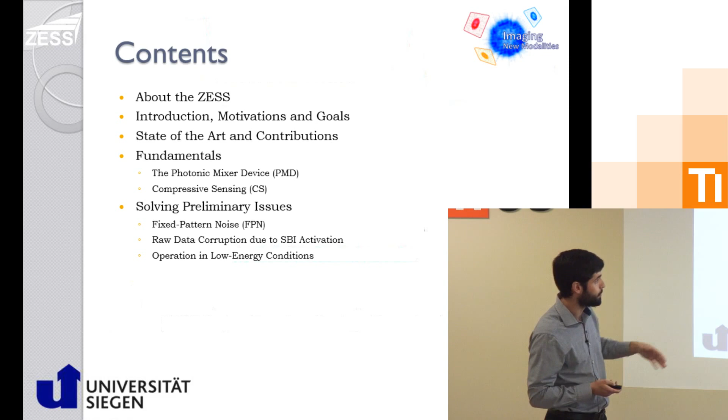Well, and finally, the core of this work is actually compressive sensing for the photonic mixer device. So this is the core of the work. We will see which are the domains in which we can actually apply compressive sensing, and within these domains, we will see we need a sparsity model, so we need to characterize the PMD pixels, modeling the transition from a high resolution domain to the low resolution domain where the signals live. And later we will see that we can actually try sparse recovery both in the spatial domain where the images live and in the time frequency domain where the modulation signals live.

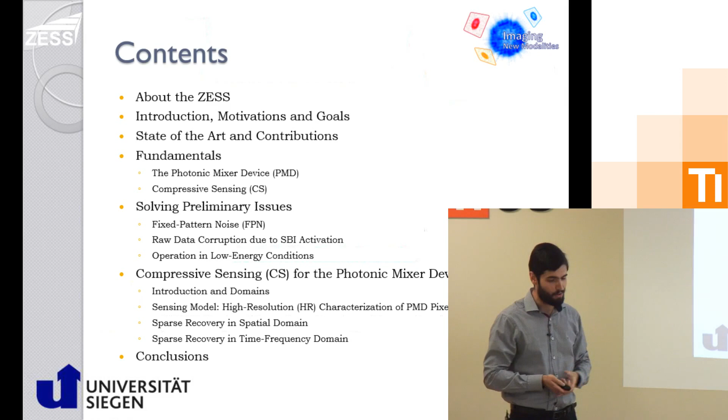Right now, we have no idea about anything. This looks a little bit strange, but we will see it's very easy. You will recognize each of the domains, and you will see that it is actually natural to proceed in the way we proceeded. And we will wrap up with conclusions that will be probably exactly repeating what we did now. So first of all, the sweet part of the presentation.

What is the ZESS, or who we are? Well, the ZESS stands for the Center for Sensor Systems. We are placed in the beautiful city of Siegen, which is actually very nice right now because it's summer. Everything is blooming, maybe too much, and we have sun from the very beginning of the day until the sunset. And my office will be probably around here. And this is a very early picture. Of course, the color is getting clearer and clearer. They are not yellow anymore, but we have a location that is very green there in Siegen. I think Paula knows.

And now we will see more or less our organization. So first of all, we have different individual project sectors, so different projects that in principle may look individual, but we have a kind of horizontal connection, we have cooperations in between, and so on. And later, well, all these projects somehow span 3 fields of competence, mostly sensor development. This is the area where you don't really want to be because things do not work properly.

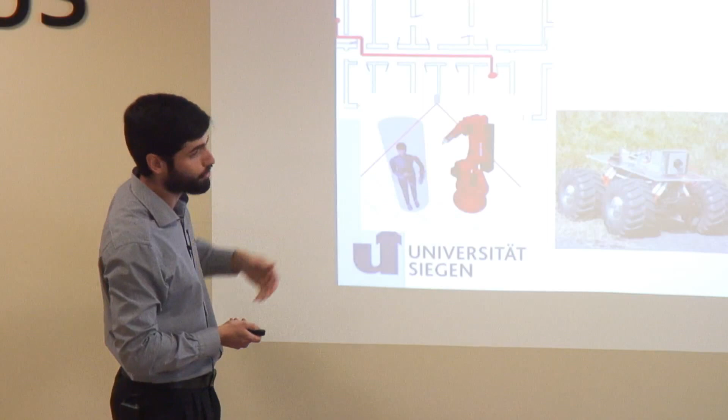Imagine these very initial SICK laser scanners that we used to mount in these mobile platforms - this really had a large cost, and of course is sequential. So one of these time-of-flight cameras could acquire the whole complete depth profile in a single acquisition. Of course we can use it for SLAM or simply navigation in a known environment, for defining safe areas in industry and things like that.

Later we also have the area of Earth observation or remote sensing, for example using satellites, drones or planes. Structure monitoring or structural health monitoring, distributed sensor systems and so on. Also, in a different area, the area of graphics, so simulation, computer graphics in general. We also covered that partially in cooperation with the GRK.

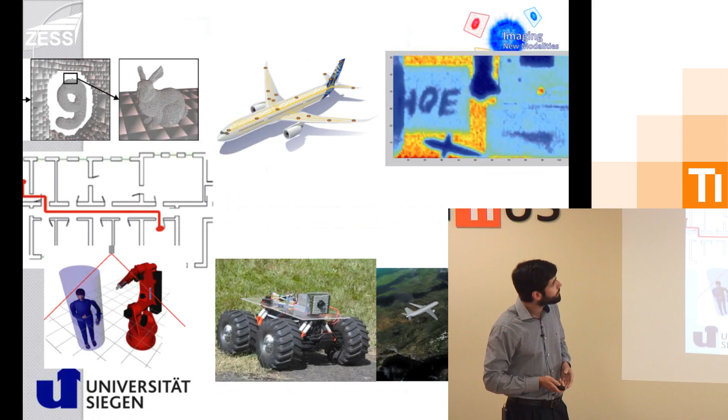And of course, synthetic aperture radar, SAR image processing. Everybody knows that radar images and SAR images are often very noisy, so the processing to get a very clean resolved image where you can actually recognize or segment structure on the ground is very important, and is one of the focuses of the institute also.

And one of our pearls, the ZESS multicam, is a 2D/3D sensor. Everybody knows probably the Kinect sensor from Microsoft, and many sensors that are multimodal. So you have on the one hand this RGB camera that is a conventional 2D camera, and on the other hand next to it a 3D camera, or a time-of-flight camera in the second generation. In this case we have both cameras in a single system with a single optical path.

So there is only one lens here. This is not a lens, this is the illumination system - the lens is within it. And then here we have a kind of beam splitter. It's not really a beam splitter, it splits by wavelengths, so you don't lose like half of the radiation for each side. We can mount inside both the RGB sensor and the time-of-flight sensor without problems of registration of different occlusions and so on that we really get in the Kinect sensor or in commercial sensors.

Well, so this is enough for a relatively close already overview of the center of what we do. And now we have to wait until the slide goes to the next. Probably it will happen, but it's good that it got blocked sadly in this one, because we are going to talk about time of flight. So definitely, oh yes, and now it's perfectly placed in the center of the image.

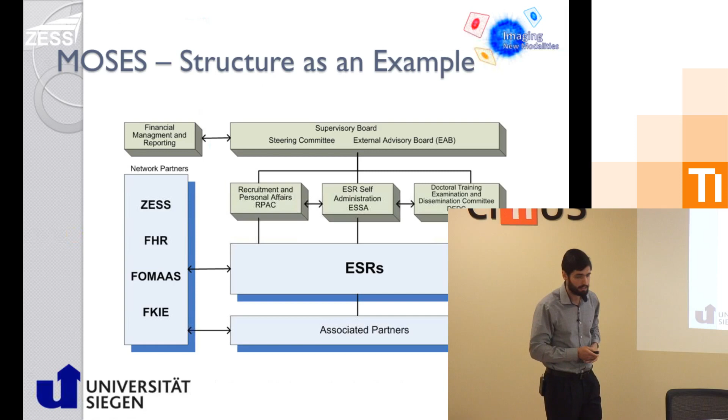And later, this small block here seems to have a lot of importance in practice: the financial managing and reporting. So that's an overview of the structure. And now we are done with the boring things, let's have a look at real results, at how what we do looks like when it works.

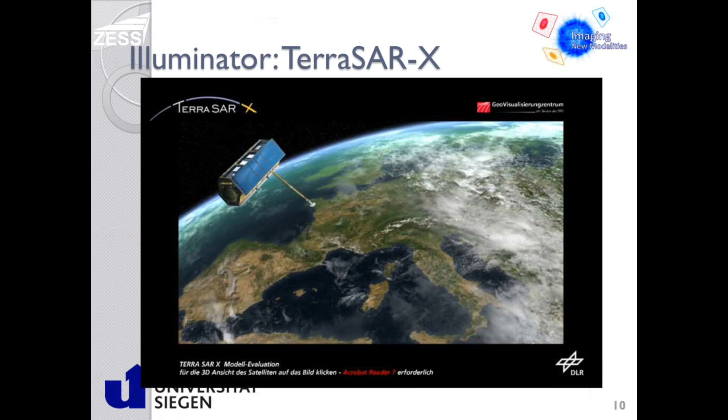Here we have something called a bistatic SAR with a stationary receiver. What we did mostly was use the TerraSAR-X, a satellite orbiting around the Earth, as an external illuminator of our scene. We placed next to the scene a system with a receiver pointing at the emitter, and another receiver getting the echo from the scene. Both signals are mixed thanks to a local oscillator, and later digitized.

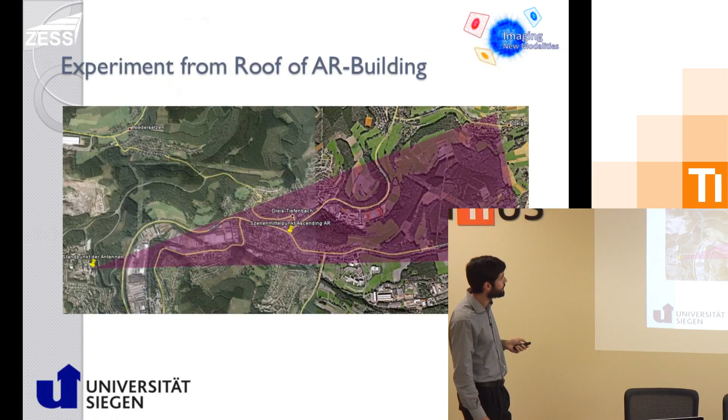And this is our scene, where both antennas were placed, these horn antennas we saw before. This is the valley in front of the university, the area of the University of Siegen from the Adolf Reichwein campus building. This is one of the horn antennas receiving the echo from the scene. We waited until the satellite went over the scene illuminating it. This is the other horn antenna pointing at the satellite, and this is the hitchhiker system, an almost practically commercial system built by our SAR team at ZESS, but completely compact, a closed solution already.

And this is the scene, and this is how the final imaging result from the SAR experiments looks like. You can recognize forest areas, areas with trees, structures such as buildings, and here a big structure which is an industrial site in reality.

So this is how the optical image from a satellite would look like. You can try to register both of them and see that there is a very good overlap. You can even see here these beams of the structure, due to the iron beams, this steel structure of the industry that in principle from an optical image you cannot really deduce what is behind.

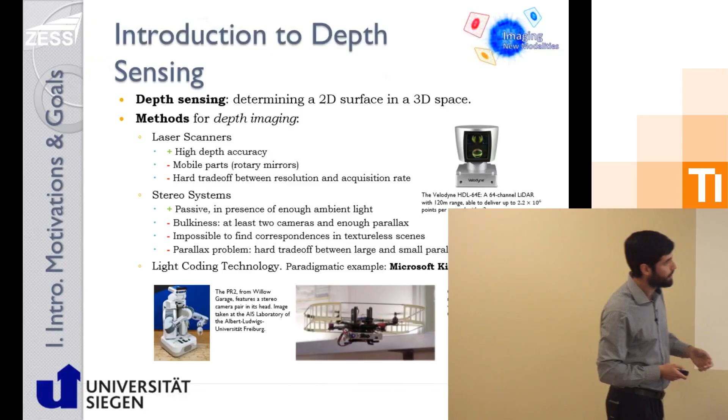It was mounted in quadcopters back 6 years ago or more, and it was doing a very good SLAM work, reconstructing the indoor of buildings and things like that. We even mounted it in our PR2 robot in the Autonomous Intelligent Systems lab in Freiburg for indoor SLAM, and it was working pretty nicely also. Okay, so this is what we have as introduction. What else we can do?

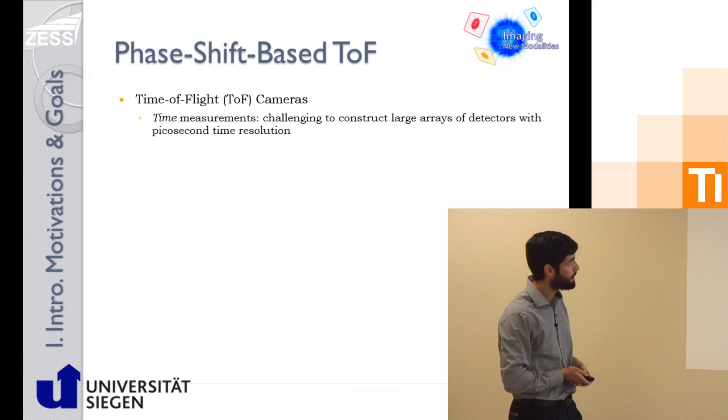We can use what is called a time-of-flight camera for 3D sensing. So, of course, time-of-flight tells that we measure time. But measuring time is complicated. If you want to build an array of sensors or detectors that are measuring time up to the picosecond resolution, you will run into a problem if you want to build really a large array of those. And therefore, we'd rather measure phase.

So we have here our user that is in front of the camera, praying for the camera being eye safe, and we emit the radiation to the subject. We typically use either an LED or a laser emitter, which is modulated by this module here, which generates both the signal for the modulation and the signal for the integration. That regulates this array of detectors, whatever a detector is in principle.

And of course, the subject is emitting a reflection that is concentrated on our array, and this reflection will be shifted. This signal was modulated in principle, and now the phase shift will contain the information we want. So the depth is somehow coded in this phase shift, and we can solve it. We have the depth from this phase shift, this is the speed of light, this is 2 times 2 pi because you have to go and come back, and this is the modulation frequency that we all know because we are modulating.

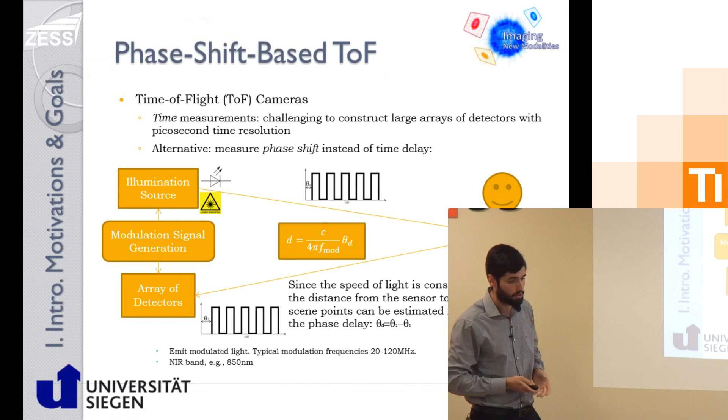So problem solved. Typical modulation frequencies are between 20 to 120 megahertz. We work in the near infrared band. For example, ourselves, we work with 850 nanometers. What are the problems? So why we had to work? Well, we have a resolution that is low when compared with conventional color cameras.

So if you compare the 19K and the 41K sensors of PMD, PMD Tech is the company who manufactures them, we see that the resolutions are definitely 1 order of magnitude lower than a conventional color camera. The Kinect sensor version 2, the newest one, has a higher resolution, but still is 1 order of magnitude lower. So when you try to combine both images, you run into a problem in principle.

And also relatively low depth accuracy. So despite theoretically you can go down to the millimeter range, in practice, in real conditions, we are within a couple of centimeters accuracy, except for the Kinect version 2, which really has an outstanding millimeter accuracy in real operation, but the range is limited to 4.5 meters.

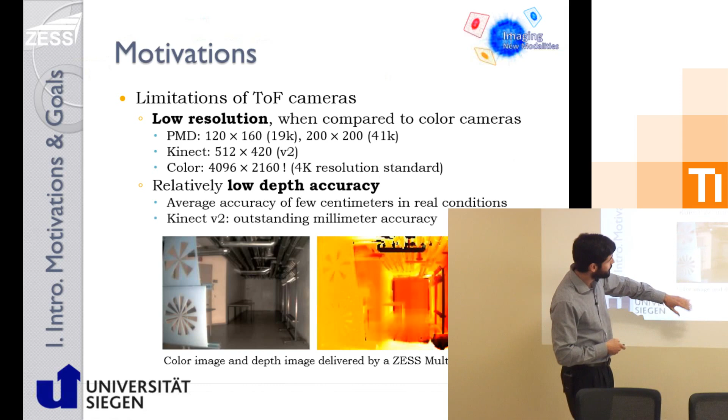And here we see the output of one of our ZESS multicams. You saw it before. So this is the color image, and this is the depth image. You cannot see much because there is not enough dynamic range, but you can already see that the resolution of the image is much lower. You see it here in this Siemens star, where you cannot resolve those fields. You see also that the accuracy is not very good. So there are rather noisy effects going on there.

Okay, so we have the problems, and now why we think that compressive sensing can help. Well, first we have to see what we have as problem from the compressive sensing point of view. So in the case of poor resolution, why we have poor resolution? If normal cameras are so good and have so many pixels, well, we need a relatively large pixel.

So the pixels are large and have a complex structure to do this phase shift estimation, and there is a relatively large blind area all around the pixel. So in the end, you have a sensitive area that is very small, and a large area that is blind.

So somehow you no longer are taking samples of a signal like in the traditional way. When you sample a signal in the oscilloscope, they are real samples. In principle, you hope so. But we have measurements that are done according to a certain measurement kernel, measurement function, that is given by the pixel itself. This is the first thing to take into account.

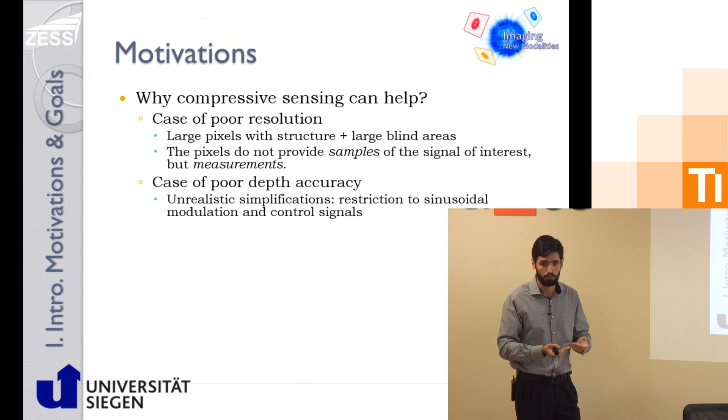The second thing is that looking at the poor depth accuracy, at the end of the day, you have to extract this depth. So you have to compute the depth from the raw measurements of the sensor, and this means modeling, and this means sticking to unrealistic assumptions. For example, we typically assume that the signals, both the modulation and the control signals, are sinusoidal to estimate this shift easily. And this is also wrong.

So in general, in both cases, we have incomplete measurements, noisy measurements, from which we want to extract our signals. This is where compressive sensing comes into the game, and we need to recover those original signals from those not so good measurements. And for this, we need first sparsity models of the signals we want to recover. So for recovering the signals, we need them to be sparse, low complexity, somehow explainable in an easy way. Otherwise, we cannot do magic. We will not be able to recover the signals if they look like random noise.

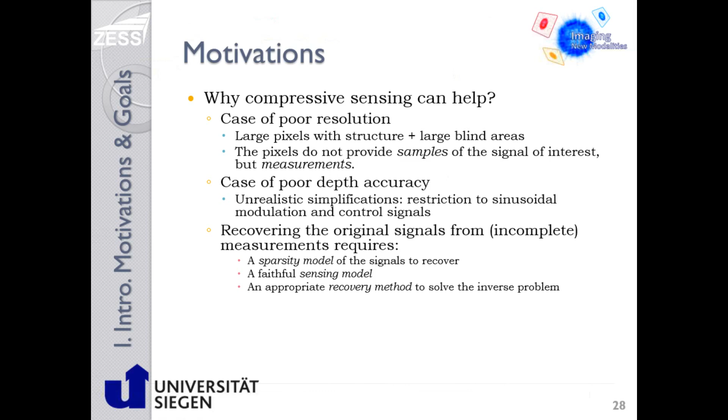That's clear. Second, a faithful sensing model. So we need to know what's going on. We need to know the forward transformation if you want to jump to the other side. Maybe you model it and you cannot jump anyway, but you need to know the way that you were following if you want to go the way back. This is a step 0, let's say. And finally, an appropriate recovery method that allows you to solve the inverse problem, which is an ill-posed problem in principle. It's an underdetermined problem. So 3 critical points, keep it in mind, but the main goal of the whole thing is to get depth images, to get these 3D images of better quality than before, using the same raw data from the same sensor.

Okay, first of all, we have to look in which signal domains we can apply compressive sensing with some advantage. Once we identify the domains, we study up to which extent the compressive sensing requirements, this compressibility, this sparsity, for example, are fulfilled. Later, we develop techniques that are oriented to optimal signal conditioning in the sense that we try to push this fulfillment of the compressive sensing requirements, okay? Optimal conditioning from a compressive sensing point of view.

And finally, this is the core of the work. We develop methods applying compressive sensing in the fields that we will find. They are going to be two. And with the main objectives of solving the problems that we saw before. On the one hand, improving the lateral resolution of the images, more pixels, but meaningful pixels, so to say, and improve the depth accuracy, so less depth error. And/or resolution. In this case, this resolution means resolving more than one target per pixel, but this will not be covered in depth here.

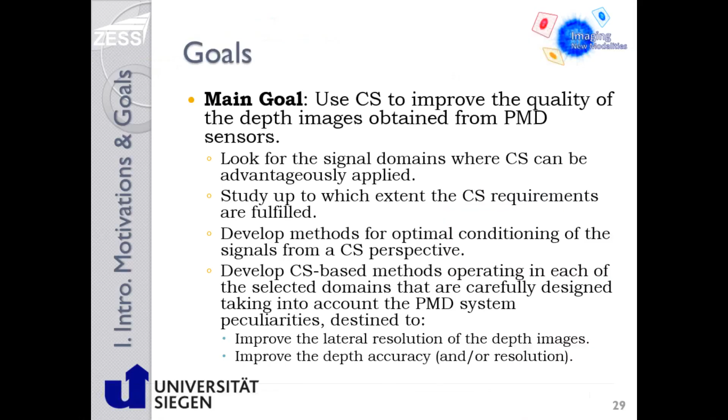Okay, did someone work on that before? The answer is always yes, whatever is the question. So, of course, we have a corpus of works applying compressive sensing to time-of-flight imaging. We have what was called a single pixel time-of-flight depth camera, which was a PMD array working as a single pixel camera, with an external spatial light modulator, like the initial single pixel camera. So it's simply a replica in the time-of-flight case. Later, the CoDAC framework, which used a photodetector instead of a PMD sensor. And it also used spatiotemporally modulated illumination. And some evolutions of the CoDAC framework in which this photodetector was substituted by a photon counting detector.

But all these approaches are kind of naturally restricted to a single sensor element. So if you can build an array, despite it does not have so many pixels, why are you going to use a single pixel element and collapse the bandwidth of the system without a reason? And then we have other approaches that brought compressive sensing to the photonic mixer device, and we have these transient imaging inspired approaches, so you can imagine many frequencies and many different phase shifts which are kind of probing the scene, and always quasi-sinusoidally modulated light.

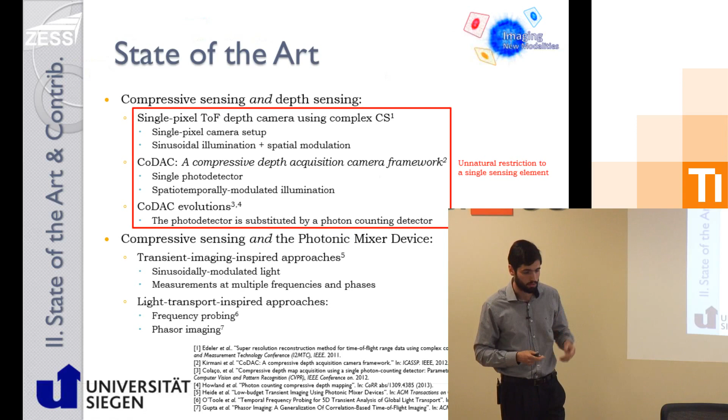And also light transport inspired approaches like this frequency probing here, and this phasor imaging. Frequency probing also uses many different frequencies as before, and phasor imaging uses a very convenient phasor formulation of the whole problem, in which the return is modeled as a certain intensity, which is the amplitude of the phasor, and the phase shift is modeled as the phase of the phasor. And they make use of the fact that at very high frequencies the global light transport vanishes and things like that. So of course you can do a lot if you really have a large bandwidth in your system.

And all these already take profit from an array of what is called correlated sensing elements, which are the PMD pixels. So what can we contribute? Well, first of all, we have some methods for solving preliminary issues that would preclude the direct application of compressive sensing into the game. As I said before, fixed pattern noise, SBI activation, low energy operation. Later, we provide a faithful characterization, this sensing model, of the response of the PMD pixels in spatial domain. So the 2D spatial domain, the physical surface domain of the pixel at subpixel scale.

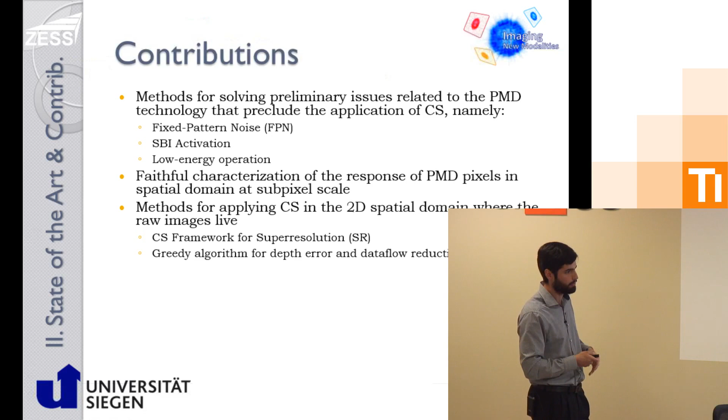This is important. And some methods for applying compressive sensing in this 2D spatial domain where the raw images live, so pixel domain, not subpixel domain anymore. And here we provide both a compressive sensing framework for super resolution, so upscaling the resolution, and a greedy algorithm for depth error reduction and data flow reduction. So this is the other way around, reducing depth error.

And later in the other domain, in the time frequency domain, so no longer the spatial domain, we have a method for simultaneous multi-channel recovery of the waveforms that we are receiving at the pixel, and later an evolution of that, which is a complete framework for both waveform reconstruction and phase retrieval. Of course, if you can reconstruct the waveform that is arriving to your pixel, you can resolve the phase. That's no problem. You have full information if you are able to recover the full waveform.

Now, probably for you the most interesting part of the talk, the fundamentals of compressive sensing and of the photonic mixer device. I will present first the hardware, the photonic mixer device, and later some concepts of compressive sensing theory. So, the so-called PMD pixels, or intelligent, smart pixels, are pixels that are able to sample the cross-correlation function between the signal we are receiving at the pixel and a control signal, which is typically the same that we are emitting, or the same shape at least.

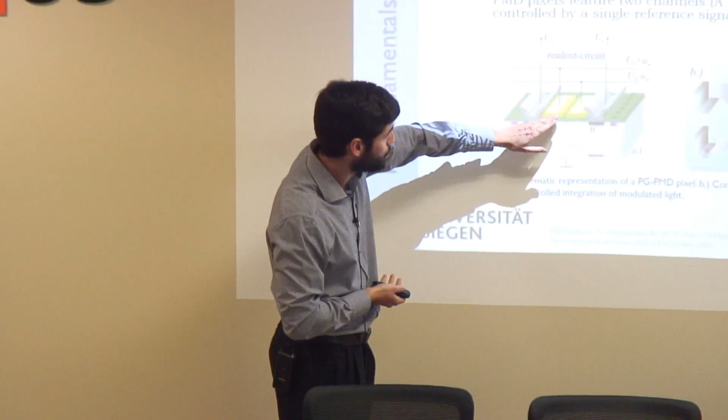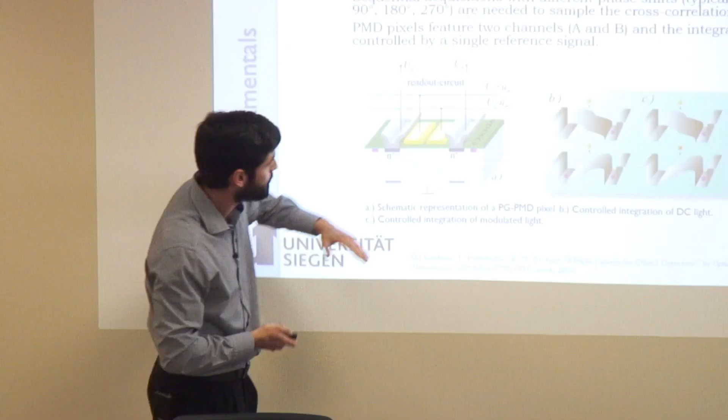terminals here on top. And of course the photons go through and collide here, and the photo-generated carriers are generated in this area here. And you use these 2 transparent terminals to produce a gradient in this lower area and push or pull the carriers to one side or to the other. And these are the integration wells where you are going to store the carriers. This is the silicon oxide, and this is silicon. And for this we need a certain potential that is relatively large, plus this differential potential that is going to control the gradient to one side or to the other.

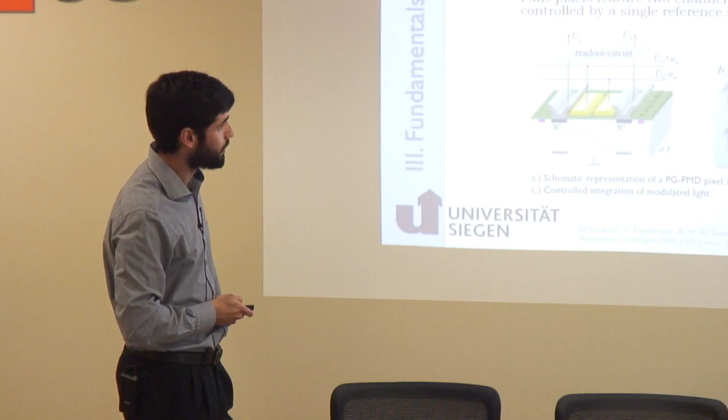And now you can imagine, if you work in a binary operation, it will go either to the channel A or to the channel B. So you have the capability of controlling the integration. Typically, square signals, 50% duty cycle. And this is how we work. We call one channel A and one channel B. Normally, once we have these 4 phase measurements, we have to extract the depth. And normally we apply the so-called 4 phases algorithm, which estimates the 3 free parameters, namely the constant offset due to the background illumination and the constant part of the signal we emit, the signal amplitude, which is influenced by the power we emit and the reflectivity of the target, etc., and the phase shift.

So those are for us contingencies, so to say. What we are interested in resolving is the phase shift, but we have always 3 free parameters, and the 4 phases algorithm is able to extract these 3 free parameters from the 4 measurements. In principle, 3 measurements would be enough, but this has certain nice properties due to symmetry. And what we do is an arctangent transformation.

Once we have the phase, we can use the previous equation we saw before. It's just a constant transformation to the depth. But as we can see here, remember, it's an arctangent transformation of the quotient between these differences between measurements. So it's a nonlinear process. Okay, now let's go to compressive sensing. So that is how the PMD technology works.

What is compressive sensing? So the challenge in compressive sensing is to recover a signal, an n-dimensional signal S, from few measurements, for example, a vector of measurements y that lives in an m-dimensional space, where m is much lower than n. So a traditionally ill-posed problem, a problem that is impossible. Now, compressive sensing requires, first of all, a linear sensing model. So we need to model the whole process as a linear transformation, which is a matrix. So we need a sensing matrix here.

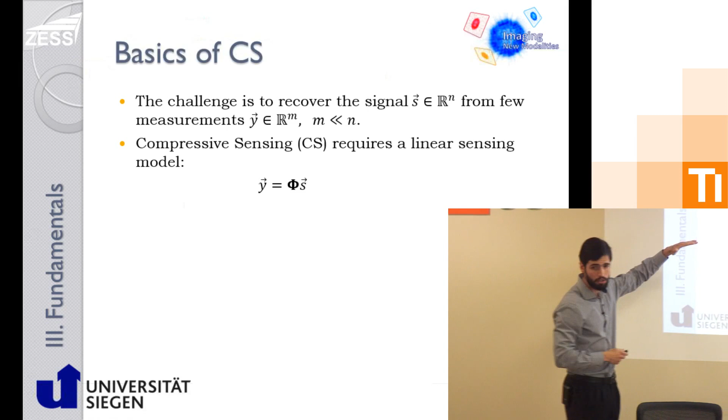As you may see, it is a wide matrix. So it's a matrix that has a number of rows much lower than the number of columns. So an underdetermined system. And of course, we have certain conditions for recoverability, and for the signal to be recovered, we need that the signal is sparse. We saw it before, or compressible. That means that the k-term approximation error decays, the compression error decays very rapidly with the compression rate.

And this, we model it as the representation with this dictionary or representation basis, which we denote by psi. And this x here is now the vector of sparse coefficients. So it's a vector in which most of the coefficients are 0. Why? Because in the real world, most of the signals are not sparse. If I see around, nothing is sparse. I don't see 0 signals anywhere. But I know that there is some structure behind. I see that not everything is random noise. Therefore, there should exist a transformation that transfers this real world signal into a sparse signal.

And this is accomplished by this dictionary here, which in the easiest case is just a basis. So it's an orthonormal basis, for example. And later we can construct this measurement matrix, which is just the product of these two, and work directly in the sparse domain. So see the system: vector of measurements, measurement matrix, a sparse signal. This is what we will see all the time. There is nothing else than that.

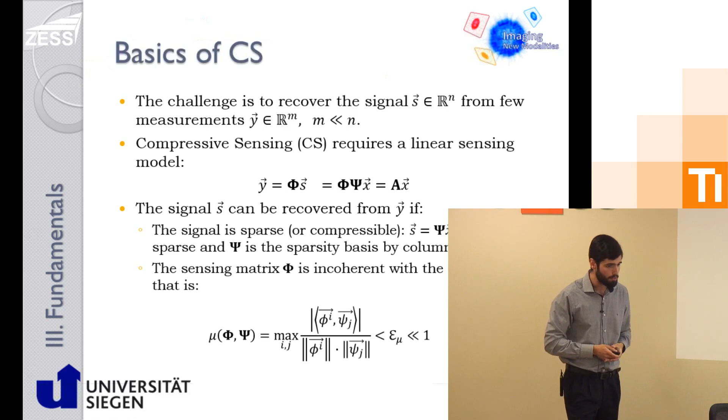How can we measure coherence? Well, this is a traditional or more or less commonly accepted measure of the coherence between sensing matrix and dictionary, which is the maximum of the absolute value of the scalar products of the rows of the sensing matrix and the columns of the dictionary. So how we sense, sensing functions, how we represent vectors, columns of our bases. And this has to be as close to 0 as possible, so as far from 1 as possible. Okay, of course, those are rather heuristic conditions.

Now we have to see, well, what are sufficient conditions for recoverability. We have some RIP-free or null space-based, so to say, conditions for recoverability, which are based on the null space of the matrix A. If you remember from algebra, the null space of a matrix is the subspace of all the vectors which are projected to the vector 0 through the matrix.

Okay, so this says to us that if the square root of the sparsity, the L0 norm of the vector we want to recover, is lower than this, then we will be able to recover the signal. And this is the minimum over all the null space vectors of the quotient of 1/2 the L1 norm over the L2 norm. And what is this saying?

This is saying that the energy of the null space vectors should not be concentrated in few coefficients. They should not be sparse. And this is because we need that differences between sparse vectors should be transferred untouched or very properly through the matrix. If those were contained in the null space, they would be projected to 0, and you cannot measure. Okay, so it's very intuitive. Here it looks a little bit complicated, but it requires a certain spread within coefficients of the null space vectors.

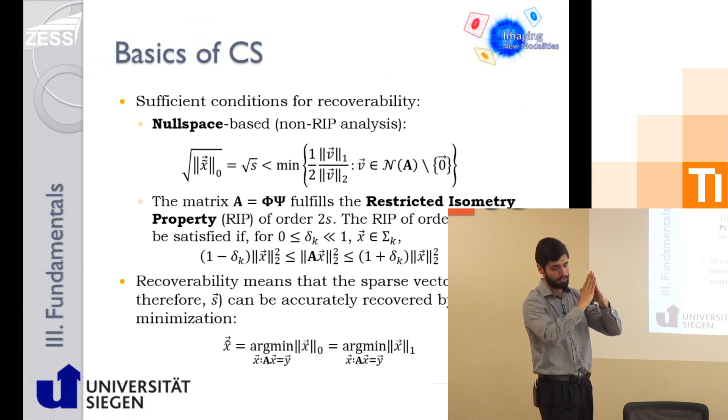But you cannot solve this problem because it's NP hard, so you need non-polynomial time to do it, and we don't have it. At the end of the day, you have to solve the convex version of this problem, which is the L1 minimization, because the L1 ball is the convexification of the L0 ball. The L0 ball goes to the limit like this in the edges, and the L1 norm is more well behaved. Okay, so that's done for fundamentals. Now let's see how we do the real work.

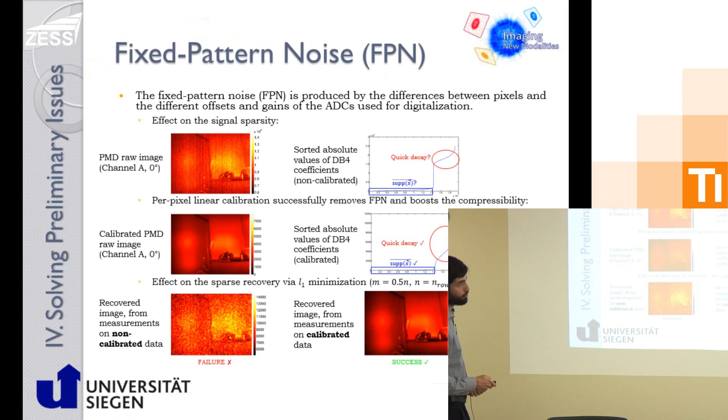The projector was a ±1 binary matrix derived from a Hadamard matrix, so not random but randomized. And the dictionary was a Daubechies-4 orthonormal basis.

This is the result if you work directly from raw data: you cannot recover the image, you cannot go back to the original domain, because you did not fulfill the requirements. But if you work on calibrated data, we see an exact reconstruction, throwing away 50% of the data. So you free 50% of the bandwidth of your system in principle.

Next problem: the suppression of background illumination. This is actually a solution, not a problem, but solutions generate a manifold of new problems. SBI is a system for suppression of background illumination. Background illumination eats up the dynamic range of our pixel, and we need to subtract it, to remove it to avoid saturation. So this is more or less how it works.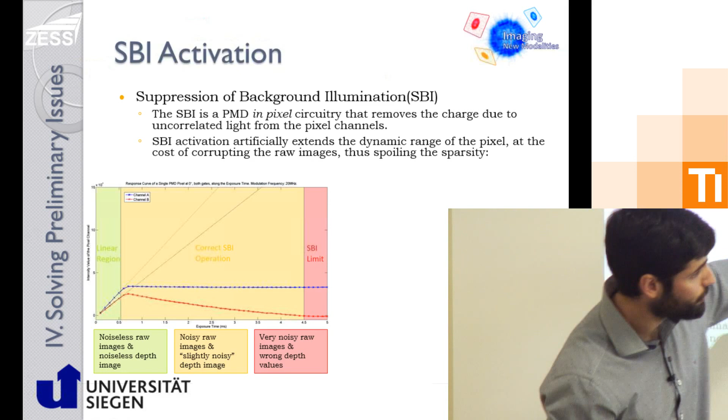This is the area where you want to be, and you never are - the linear area where your pixels are integrating properly. At a certain point, one of the channels approaches saturation and the SBI starts to be active. It removes a constant current from both the A and B integration channels, so that the most charged channel remains constant, and the other decays so that the difference of the slopes remains constant. So it doesn't matter anymore what your exposure time is; the measurements will be right. This difference of measurements will be preserved, which is what you want.

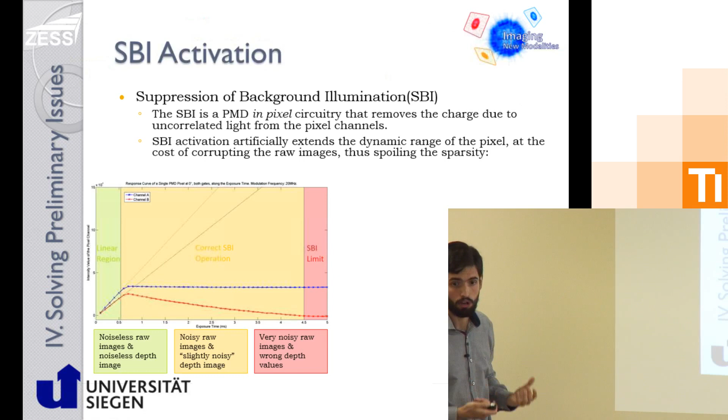The problem is that nothing is perfect. This is a capacitor being discharged, and you cannot go like this - as it discharges, this is no longer a straight line, and sooner or later this goes close to zero, and you cannot break through zero. You will be within the SBI limit, and you will have not only very noisy images, but wrong images. The depth image will be wrong, the values of the depth will not be valid anymore.

How does this operation affect our case? In the conventional operation, for relatively low exposure times, everything is fine. This is a scene of relatively large dynamic range, a corridor, longitudinally focused, and we see a nice decay - most of the coefficients are below the noise level of the sensor.

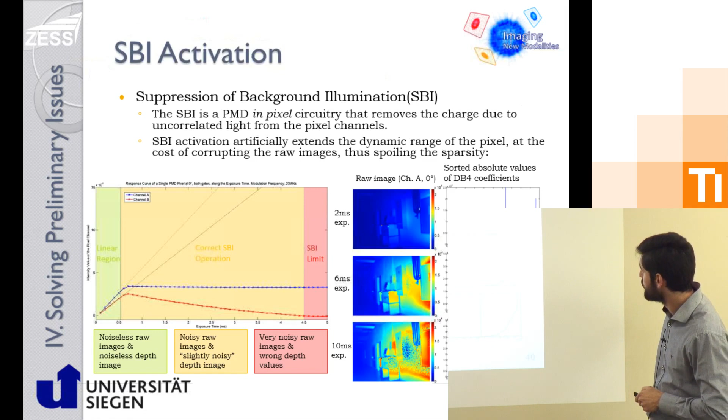If we start increasing the exposure time, we work in this area, and we see that the SBI gets active for some pixels there. We lose compressibility, we lose sparsity, and these lines move towards the left. If we really go to large exposure times, we start to recover a structure here, a door, and there's another light, which can't be seen here but is. You get some pixels that are at the limit, and you get very noisy raw images, which you will not be able to process in a compressive-sensing-friendly way because you are really losing sparsity there.

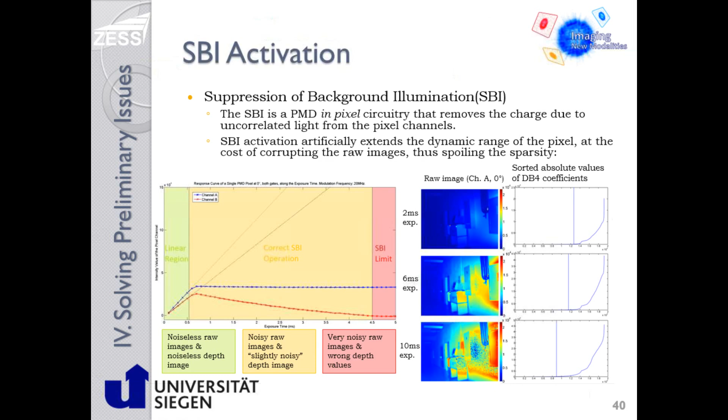So what we did was develop an adaptive high dynamic range technique. Everybody knows HDR acquisitions nowadays for conventional cameras, for your mobile phone - it simply takes several pictures and combines them to extend the dynamic range of the final image. We did it in a more sophisticated manner, an adaptive framework that adapted a set of short exposure times to the foreground object - the object causing saturation, coming into the scene, a car, a person, or whatever object very close to the camera - plus the acquisition time of the background.

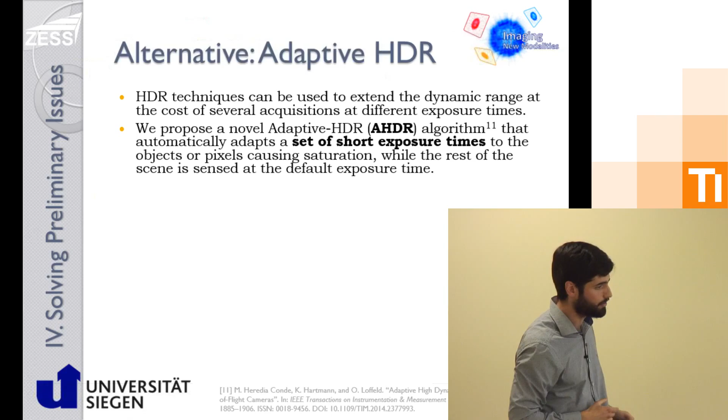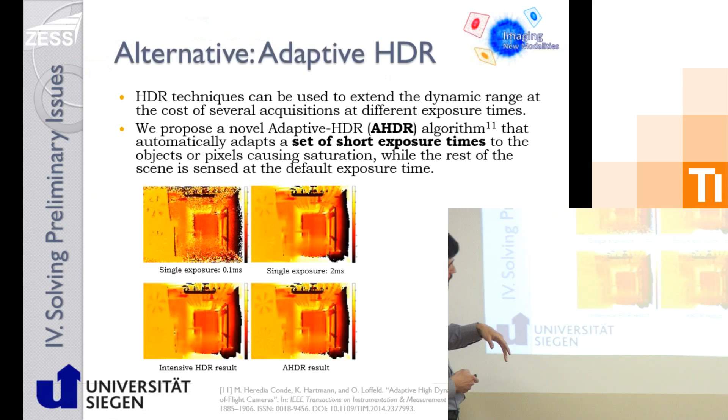If you perform an intensive HDR, you solve all these problems, and we saw that our approach is even slightly better.

And furthermore, we got an increase of lateral resolution by a factor of 3. Those targets are used to estimate the effective lateral resolution of the sensor, and we were able to recover those targets with 3 times more lateral resolution.

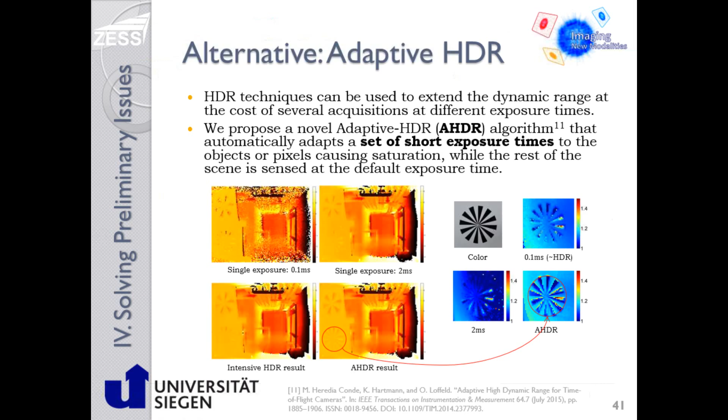Okay, problem solved. The last one: operating in very low energy conditions. This is important because in some applications you will need it, or it will be a requirement. In those cases, your measurements are samples of a Poisson distribution, and a Poisson distribution is not a nice distribution, because the variance of the random variable coincides with the expected value, which is the parameter of the distribution.

Of course, we have traditional variance stabilization techniques that can help as a pre-processing step, and classical denoising techniques like bilateral filtering that can be applied, and they work up to a certain extent. Work has been done on that by Benjamin Langmann and in our group. Mostly, a bilateral filter integrates both spatial proximity, so proximity within the pixel domain, and intensity proximity. Intensity means the value of the pixel in our case.

What was done was mostly for detail transfer and upscaling. Why? Because the RGB images were high resolution, and the depth images were low resolution, so the idea was: can we actually perform a joint bilateral filter in order to transfer the high resolution detail of these images to the depth image? The answer is yes, it was working very nicely, and those weights were applied to a filter working on an upscaled version of this low resolution image, and we could really transfer detail.

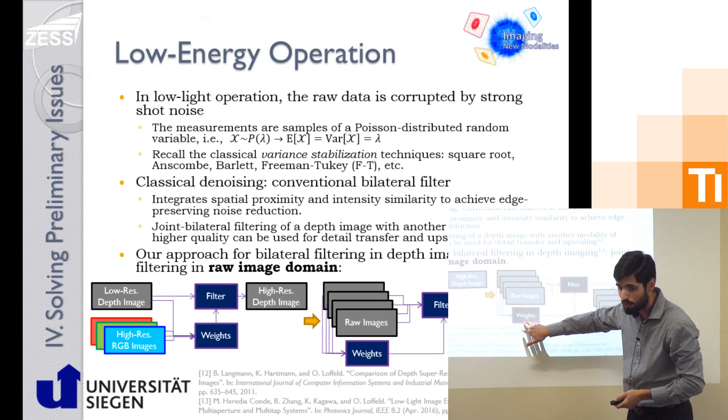So it is more meaningful, and this is what I did in the past, to filter in the raw image domain. We have a set of raw images. All this time-of-flight imaging works with sets of images in order to estimate a single depth image, so we can process them simultaneously to compute unique weights that are applied to the filter, to each of those raw images, and generate a set of joint bilateral filtered images that we can use to generate the depth images.

This is what we got. This is definitely not a mistake. We were able to go down to the microsecond range in conventional operation. And this is what you will get simply taking the first set, as it comes from the sensor, you compute the depth. This is what you get - a depth image. Those areas behind, you have variabilities of several meters.

So it's rubbish. If you apply a conventional filter over this, it will smooth out all the detail and the measurement is completely meaningless. If you apply this filtering in the raw image domain, we see that the depth value is actually not so meaningful still, but you could use it for segmentation purposes, or at least foreground segmentation, things like that. You don't have jumps of meters as before.

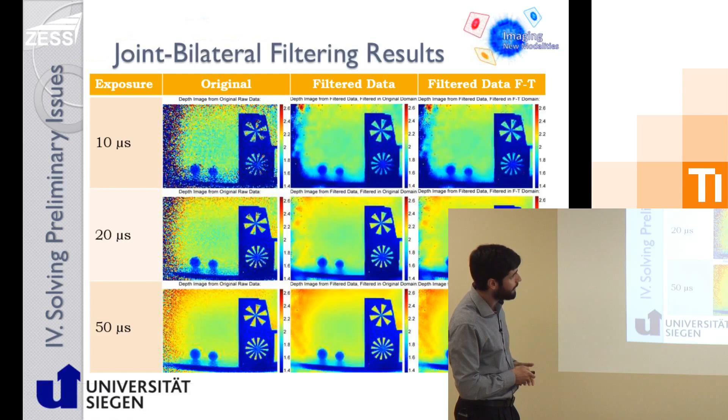Already with 20 microseconds, we see that the results are very nice already. You can use it for measuring, and for 50 microseconds, the results are even better than with conventional exposure times, because this pre-filtering really removes a lot of noise that is present in normal operation.

So, 3 problems solved. Now we have grounded more or less all these problems that we had before, and we are ready to deploy our compressive sensing machinery. We solved the preliminary problems, and now we can recall what we needed: linearity of the measurement model, sparsity or compressibility of the signals, and incoherence between sensing and representation.

Okay, we already get the first problems. First of all, we have a very non-linear sensing model. There is no way to linearize that. I mean, you can linearize it, but together with the fact that you have noise, this is a non-linear noise amplifier, and is the best way to go to hell. So there is no way to linearize an arctangent of a quotient. So you cannot linearize the complete measurement pipeline.

And therefore, we are forced, or better said, recommended, to work in the raw image domain. And this is what we are going to do. And there we recognize two domains. We said that we were going to look for them. So we have the spatial domain, where the raw images live.

People who work with images know they are compressible in Fourier bases, but there is this lack of spatial resolution of the Fourier bases. DCT, so locally centered, and wavelet bases, in which you have real localization. So in all those domains, we can apply compressive sensing in the spatial domain, and later in the time frequency domain. Depending on the system you have, you will always be sparse in the time frequency plane, because if you were dense in the time frequency plane, you would be a random noise generator.

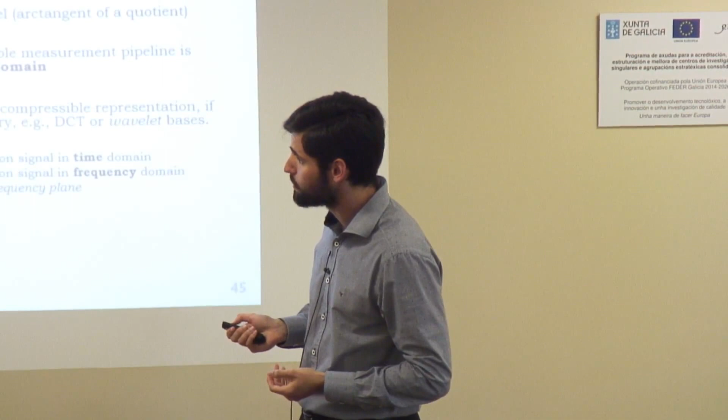Therefore, in pulse systems, you have sparsity directly in the time domain, so you are emitting signal within a certain time and all the rest is zero. And in amplitude modulated continuous wave systems, like our system, we are sparse in the frequency domain. So we emit with a certain restricted bandwidth and all the rest is zero in frequency. And in general, we should exploit the sparsity in some more general region of the time frequency plane. So we simply have to recognize in which region we are working.

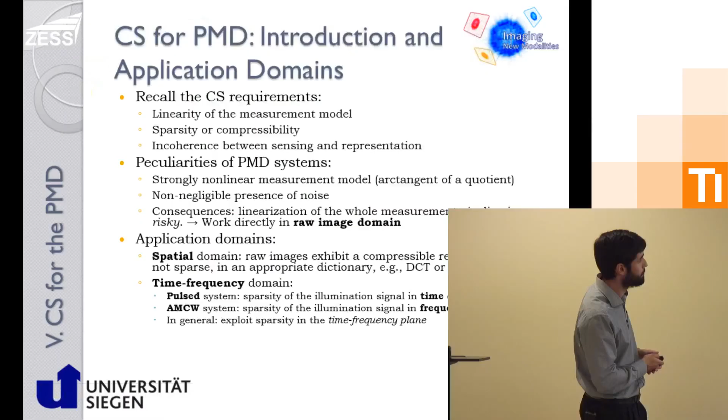So now to the fun. Let's model the whole thing. Let's go to the lab, break a sensor, and look inside. So we removed the infrared, well, the daylight blocking filter of a commercial PMD 19K S3 array. We took a picture, and this is what we see. In principle, a person not familiar with the technology could not even see what is a pixel.

So a pixel is actually something like this. Okay, this is a pixel. But we have areas that are metal shielded. This is metal shield all around, and this is also metal shield, and areas that are, well, silicon, something. But we in principle do not know what they are doing.

So we take a fluorescence lifetime imaging microscopy of the sensor to see which areas are actually active, and we see that the areas that are not black are active areas. If we perform a kind of segmentation, we see all that is white here is an active area. So photons hitting these areas may be integrated, may be also lost, but in principle, photons reaching the black areas will be for sure lost.

If you are working in imaging technology, you know that this is not like an imaging chip should look like. Probably we are losing a lot of energy there. And actually, we are losing 69% of the energy that is reaching the chip because it's blind, this area.

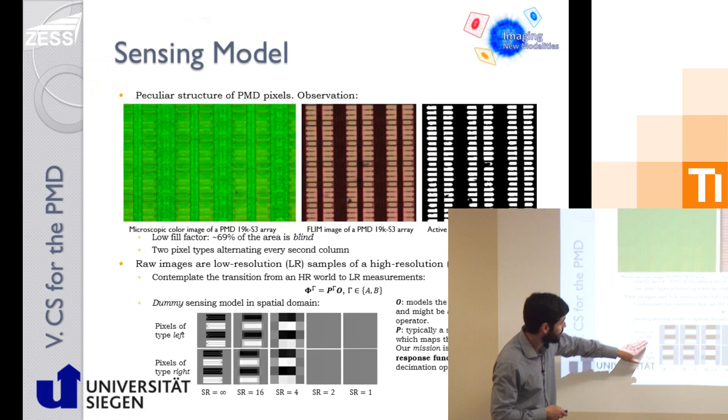And also we have two different kinds of pixels that are alternating every second column. We call pixels of type left the ones with the readout wires at the left, and pixels of type right the ones with readout wires at the right. And in principle, we need to model that.

So we need to model, if we want to aim for super resolution, how an infinite, or high resolution signal, a high resolution image, gets from the high resolution domain where it lives to the low resolution domain where the images we have live. We have a low resolution image, not the original one, and we want to come back. So you need to model the forward process, and this is what we try to do.

And this is our phi, so our sensing matrix, which models that, both for channel A and channel B. You can forget about the gammas. This has to be done for each of the channels. And this is an operator modeling the optical process, so the optics that are in front, the objective, filter, and so on. So it's mostly a smoothing operator.

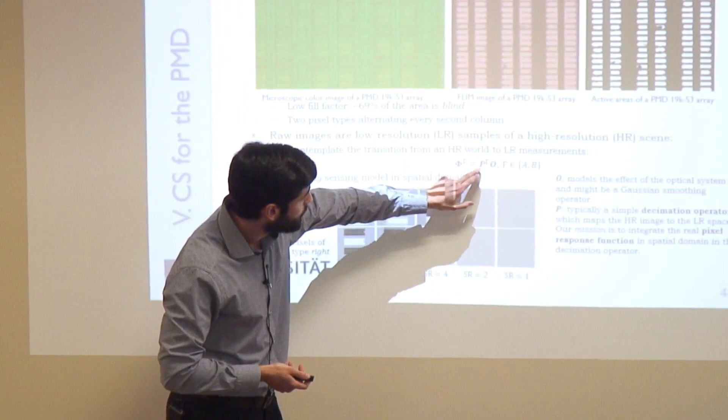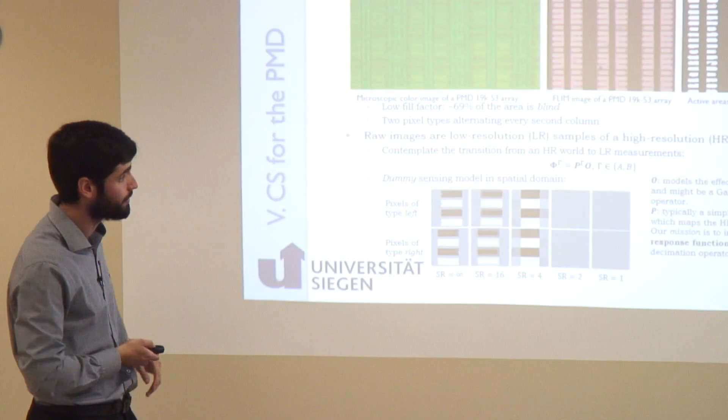And this is going to model the spatial response, so the response in the 2D domain of the pixel. If you had a pixel that has a constant response, like it should be a photodiode, for example, then you could use a constant model, and this would not exist. It will be an identity matrix, and you will be measuring real samples of the signals, average samples of the signals, and then you could use the typical model of Gaussian smoothing plus regular decimation, and you will be done.

But this does not seem to be the case, especially if you aim for larger super resolution factors, because this is just a dummy, naive model from what we observed. We did something like this, and we said, well, okay, for super resolution factors that are 2 or lower than 2, the model does not matter because the symmetry of the pixels already does the work for us, and it is completely equivalent to have a constant response.

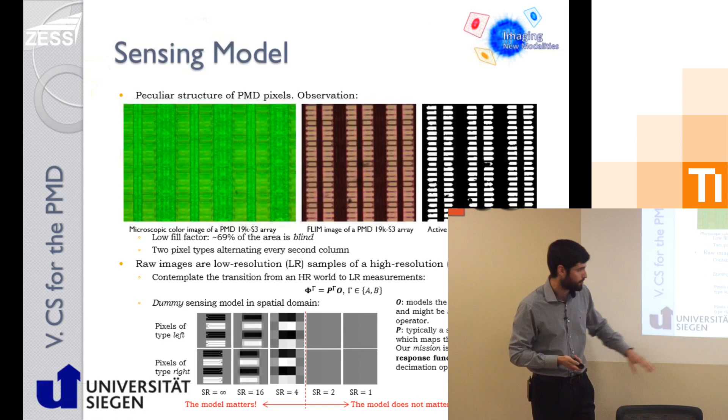But if you want more, then it is not naive, and you really need to model how the pixels are integrating the photons. Otherwise, you do not know the forward transformation. And these are the cases we are going to be interested in. And how can we do that? Well, we can go to the lab.

Well, we were already in the lab and tried to generate a kind of customized camera in which we mounted here a PMD front end. So here is the chip. Here we have one of our multicam backends. So this is what remained from the multicam, where the FPGA is, and so on. And this is a microscope probe holder. So this is what is mounted in an inverted microscope. And this is just for the lenses of the microscope to go through.

Hardware, well, this we already said, with a stepper unit for displacements and a laser for hitting the sensor, 477 nanometers. This is the reason why we had to remove the infrared filter on top. And this is how it looks. We mounted it in the inverted microscope. We have the laser circuit under it, and those are lenses which we use to focus the laser with a very narrow beam on different points of the pixels.

And what we did was to do this for different points of the array or of the pixel and surrounding area, and simply record the responses. So record what we get in channel A and in channel B in each of the measurement points, and we repeat the process, illuminating exactly here in the pixel, and so on and so forth. And if we do that with enough samples, with a grid that is dense enough, then we are going to end up with a complete, discrete, but dense response of our pixels, which will maybe look like this for channel A and like that for channel B.

This is reality. So these are the results we obtained. Measurements from channel A and from channel B, making an image of what we obtained at each of those points. Okay, those are not photographs; they are just the results we were talking about before. And for visualization, I subtracted the B channel from the A channel. So things that are red here are mostly response in the A channel. Things that are blue are mostly response in the B channel, so that the difference goes negative or positive. So this is for a pixel of type left, this is for a pixel of type right.

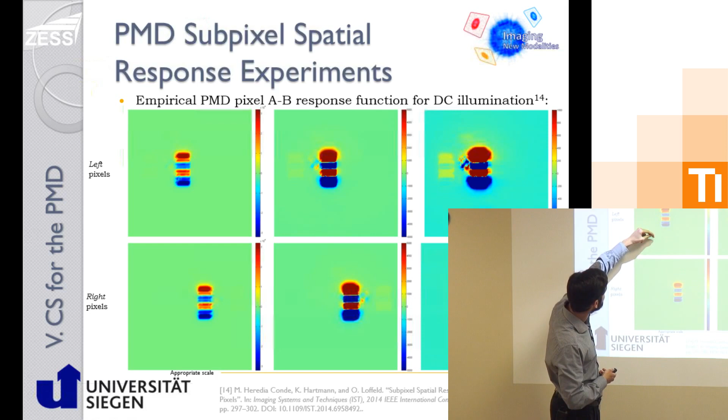So you see you can hit areas of other pixels of the array, and of course there is no response in that pixel. This is in principle good. And you see that if you hit here, the photon will contribute to the A response, but never to the B in principle. So you should expect, if you work in DC, as we did for this experiment, that everything is green, but it's not. So it means that there is a correlation, an influence of the position where the photon is arriving on how it is being integrated.

This is of no importance for the normal operation of the pixel, because somehow, let's say, you multiplex the operation in the spatial domain. But it is of importance if you want to go beyond and try to super resolve the image. Otherwise, you don't know the model.

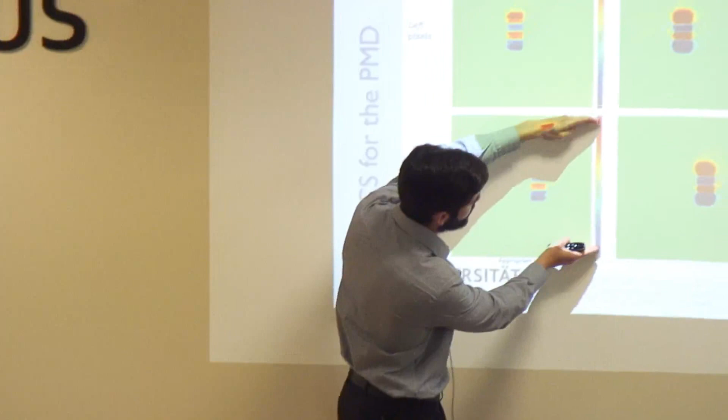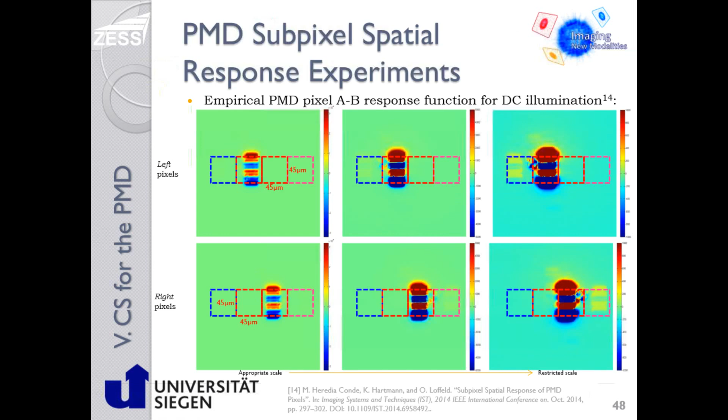And later on, what we can do is to restrict this range and see how the image is saturated. And if we really restrict the range, we see cross effects. So we see that if we shoot photons at this pixel here that is next to it, we get very weak responses, but we get responses in the pixel we are measuring. So there is crosstalk between PMD pixels, and one can at least observe it using this experiment. So this is the position of the pixels, 45 by 45 micrometers, very large pixels in principle. Okay, and now we can go further and add an additional dimension and try to use modulated light and raster the phase shift.

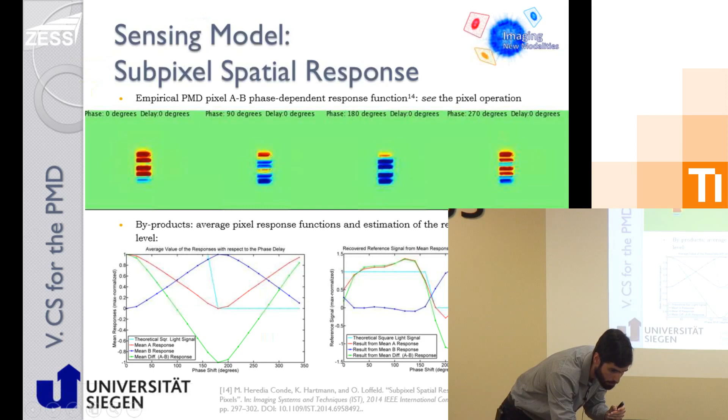Okay, so make a sweep analysis on the phase shift and see how the pixel is working. Okay, this allows you to see somehow how the pixel operates. So focus, for example, at the zero phase.

Now we are going to arrive to 180 degrees, in which we expect that everything gets integrated in the B. But you see, there is still some remaining part there. So not everything is blue. It means that if your photon is hitting exactly there in the pixel, it will be integrated in the A, despite you set the pixel to move everything to the B. But the modulation contrast is not 1, and you have these problems.

Now we are getting to 360, that is the original 0, and therefore everything should be integrated in the A, but you see here there is an effect of a certain non-zero value that has been integrated in the B.

Okay, now just for fun, we can integrate those responses along one of the 3 dimensions or 2 of them, for example, along the spatial dimensions in 2D, and it remains only the phase, and we can see how those signals are. This is A, this is B, this is A minus B, so it means that we are dealing with a triangular behavior. So we are dealing with a cross correlation between more or less square signals. So they are not really sinusoidal.

And one step further, we have the measurements, which are samples of the cross correlation. We can make a deconvolution with a theoretical light signal. It was a laser, so it was a relatively clean signal, square. And if we perform a deconvolution with this signal, which is a square, up to the discretization, we get something like this. So it means that the control signals are more or less trapezoidal. Okay.

And what one could do, for example, as a demonstrator, would be to model this crosstalk effect as a convolution with a certain crosstalk kernel, okay, and try to deconvolve. And we did it. It's published here. So we decrosstalked the image a posteriori. Be careful. It's a relatively tricky thing, because if you have noisy images and you deconvolve with this kind of kernel, well, you amplify the noise, okay? But since it is a very soft kernel, so to say, and it practically only affects the edges, you only get a correction at the edges, and the results were relatively nice. But this is a different story.

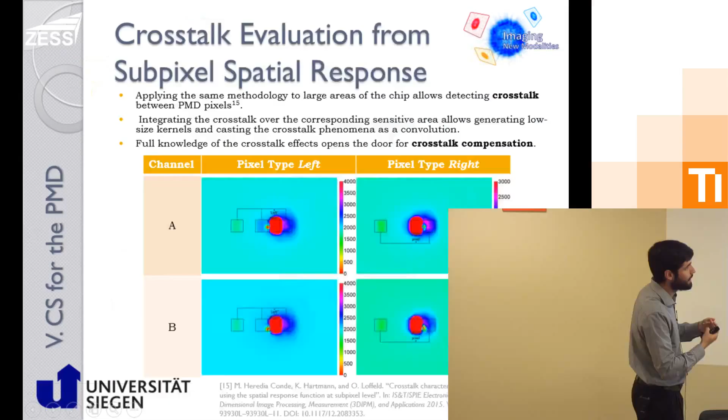Where we are focusing is in getting these responses, these 2D responses. And this is what we have now. So we have already one of the main requirements of compressive sensing. We have our sensing model, which is modeling the transition from the high resolution domain to the low resolution domain. So one of the biggest stones, we have it there. And they look like this, and these vectorized are the rows of our sensing matrices. So we know how our system is measuring.

Now the next big stone is the representation. So we have to know how we should represent the signals so that they are sparse. And for this we need to find an optimal basis. We see that a Fourier basis works very nicely for compression at the beginning, but it never goes to zero representation error because of the lack of localization of the basis.

And if we use wavelets, Haar wavelets, Meyer wavelets, Daubechies wavelets, doesn't matter, the results are the same. Very good results. Those are for the 8 raw images, so 4 raw images for the A channel, 4 raw images for the B channel, and all of them behave equally. And one could take this wavelet representation, or, for example, try to recover using bounded total variation, which is more or less a sparsity in some more general gradient domain, and we already have the whole system mounted. Now we can go to the work and bring compressive sensing into the game.

Okay, so of course, if we want to super resolve, to upscale, we saw those nasty blind areas. Of course, if we never got any signal from this area, we cannot reconstruct what we never saw. That's clear. Therefore, we will need several different images, fewer than what we will need for traditional super resolution. So if we want a super resolution factor of 9, so 9 by 9 pixels per pixel, we will not need to measure 81 times, but we will need to measure in some different positions in order to cover the whole domain, okay? One cannot do magic, okay?

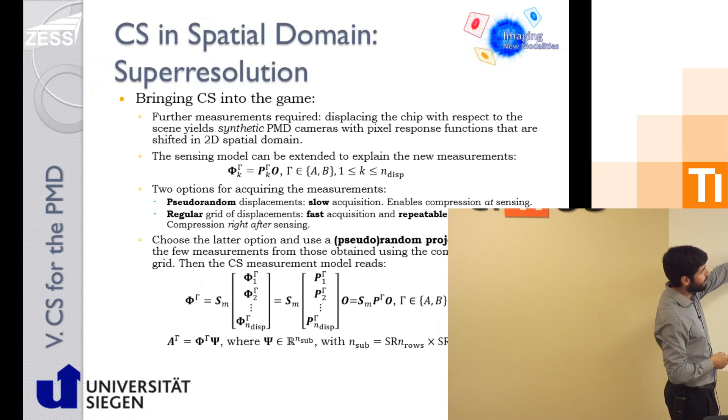Okay, there are 2 options to do this. The best one is pseudo-random displacements, which is the most compressive sensing natural one. So you just take M measurements according to some M different pseudo-randomly chosen displacements, and the problem is that it's slow in the acquisition because of the system of this stepper unit. It works very nicely with stepwise acquisition, but it does not work so nice if it has to go to a completely different point. And this enables compression at sensing, so you don't need another process afterwards.

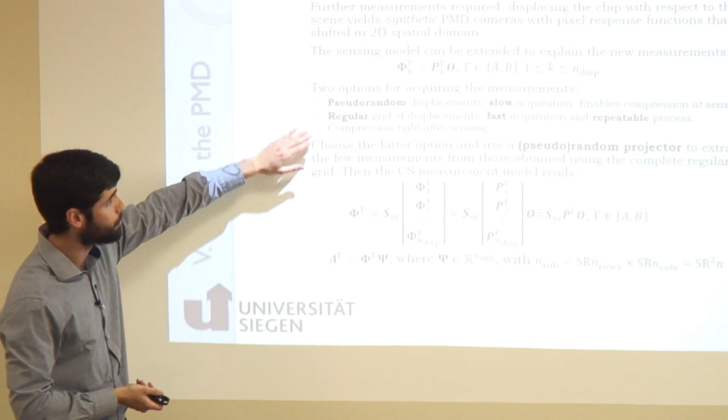But what we finally did was a regular grid of displacements, so we acquired all the points, which enables a very fast acquisition, and is very repeatable, and later we compressed. So we compressed right after sensing, so to say. Okay.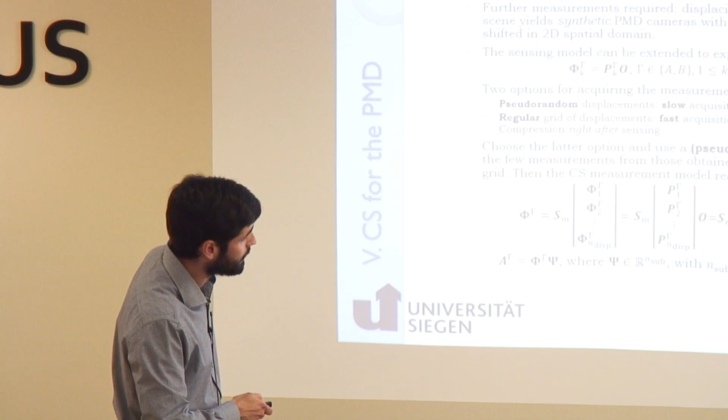And here we have the whole thing stacked. So the only thing that changes is this phi matrix. Sorry, the P matrix. The phi is the composition of the previous for every k, where k goes up to the number of displacements. And this is the pseudo-random projector that we use for dimensionality reduction. And these are the different P's stacked one over another, and by abuse of notation, we call this again P gamma, as it was before for the case of one single camera. Okay, and there we go. So we have everything we wanted.

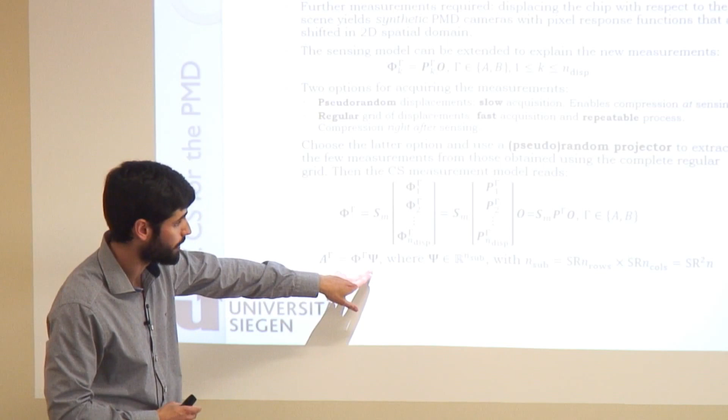If we take all this phi plus the sparsifying dictionary together, we have this A gamma, which is the A matrix we wanted before. So we have our complete measurement matrix. And now the dimensionality is this n sub, where sub is for subpixel, which is higher. It is super-resolution factor times the original number of rows times super-resolution factor times the original number of columns, which is therefore super-resolution factor squared times the original dimensionality of the problem.

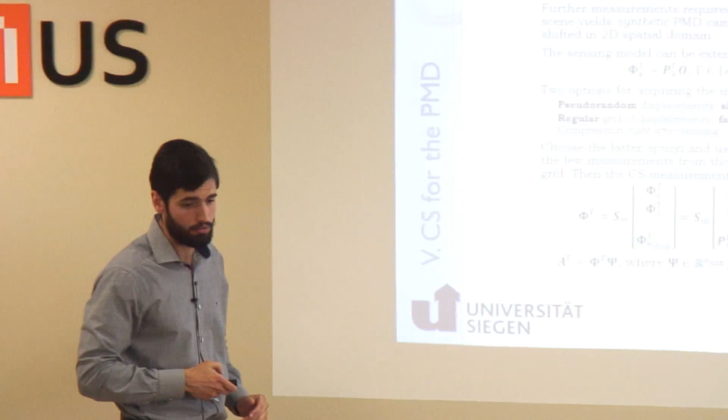Okay, does it really work? Surprisingly, yes. For the projection, we used a Hadamard-derived binary pseudo-random matrix as before, but for the sparsity basis, we tried with the Daubechies 4 wavelet basis. But the problem is that you saw the sensing kernels before, how they look. So they are highly correlated with some of the elements of the basis. Therefore, we do not fulfill this requirement of low coherence between the sensing and the representation, and therefore it cannot work properly. And in the end, we exploited the sparsity in gradient domain. That means we perform a total variation minimization without explicitly modeling the dictionary as a reconstruction method.

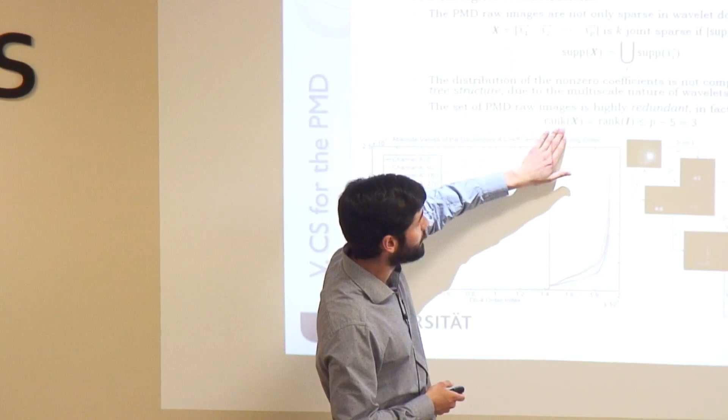And last but definitely not least is that this matrix composed in this way has a rank that cannot be higher than 3. One can already intuitively see that if you think that there are only 3 free parameters. So there are not more than 3 degrees of freedom, and therefore the rank cannot be greater than 3. So we have 3 restrictions that were not implemented before, and for this we developed a specific ad hoc algorithm for taking that into account in the recovery.

So the measurements are performed like before, randomly, for example, and now we recover the image from this y vector of measurements, or matrix in this case, because we do it as a block of all the raw images simultaneously. And I will not go through the algorithm, of course you can go yourself if you want, but it integrates both the multi-scale operation that exploits this wavelet structure, and this rank is implemented here by an SVD decomposition of the residual that is of course now a matrix, preserving only the 3 most important columns in this case,

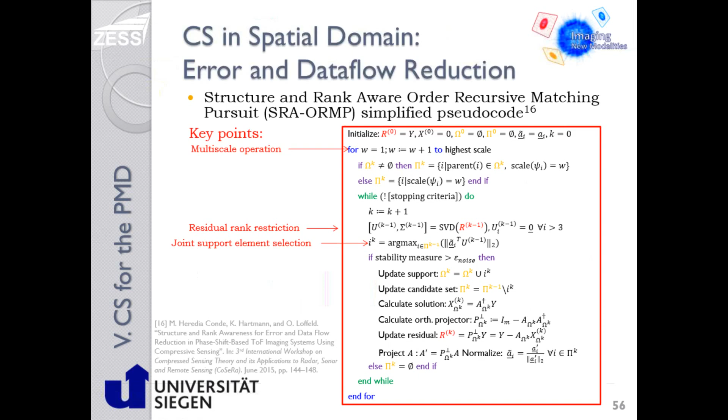and later a joint support element selection that happens here, in which we exploit the joint sparsity, because the indicator of the sparse coefficient, so this is just an index, is selected taking into account the set of all the images, because this is a matrix. It's no longer a vector like usually, so you are not looking for the highest correlation between each of the columns of your measurement matrix and the residual, but you are looking at the L2 norm of the product between this vector and a matrix, which is a modified residual matrix, so to say.

So you implement all this in this algorithm, and the result is, if you compare it with conventional single measurement vector L1 minimization, this multiple measurement vector approach that we called structure and rank aware order recursive matching pursuit, so a greedy approach, you can see that it is always superior to the case in which you do the recovery image after image. So you can do much better processing all things together, taking into account these peculiarities of the data, than doing it separately as if they were independent images.

Of course, heuristically you can already think about that, but you really have to go deep into these details, and transfer it to the implementation in order to get a real tangible result, like in this case. So if you look below, you see that we got a reduction of the root mean square error in depth domain that can go up to almost 50% reduction. You see that this wall behind is pretty clean, and you still preserve high frequencies and sharp edges there, so there is no problem of missing frequencies.

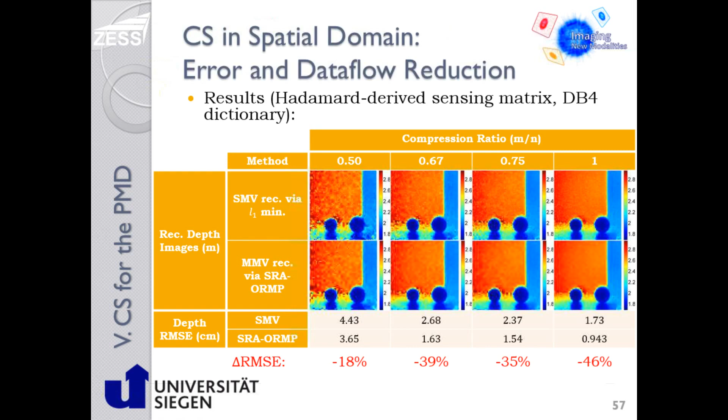Okay, here we don't have compressive sensing anymore because the compression ratio was 1. Here we have a very strong compression ratio, but we really don't clean much the noise if you compare it to the original image, and therefore we can play and look for custom trade-offs between depth error reduction and data flow reduction. And still, you can go here, you will have an image that is cleaner than the original with no compression, and you still would be reducing the data by a factor of, sorry, 3/4. So you are doing both things simultaneously.

And finally, the last thing that I'm going to present is the time frequency domain. All that was in the pixel domain, so image processing, if you want to call it like that. And now let's go to the time frequency domain, and let's try to recover the waveforms that are reaching the pixel. So we have a certain optical signal that is reaching our pixel. Now we will try to recover the complete waveform. Once we have the waveform, we also have the information on the phase.

The cleanest way to do it, or the easiest, just for trying, we put a delay generator completely externally. This is a conventional PMD imaging setup, so a PMD front end. We have the LEDs here that are controlled by the same control unit. Infrared LEDs, the scene, the reflection, and the PMD pixel here performing the cross correlation, which is also controlled by the reference signal. And we put simply a delay generator here, which is controlled by this external PC, a control unit, and we simply measure at different delays. And from measurements at different delays, we can completely recover the signals.

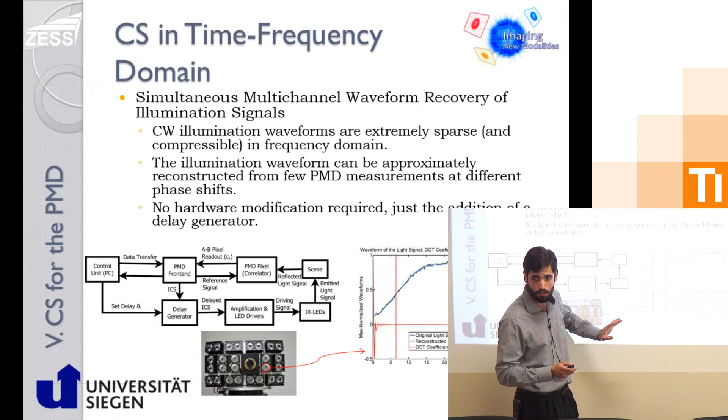Why? Because you can see that those signals, this is a real signal in blue, and this is the DCT representation in red. So you can see that with 10% of the DCT coefficients, we can completely recover the signal. All the information is there. So here in green, you have the reconstruction using only this part of the DCT spectrum. This is just to show that they are very compressible signals, and that's why we can recover them.

These are the results. For a number of discrete steps of 32 steps and 64 steps for the whole period of the signal, it is a periodic signal, we have a reconstruction that is pretty good for that discretization level. If we go to further levels of discretization, so to 128 and more steps, we get problems. Why? Because in the dictionary we are getting high frequency basis elements for which we are not performing good enough measurements. So we cannot see those frequencies and we are trying to reconstruct them. So using this discretization means trying to recover frequencies that we are not seeing. And this is because our sensing scheme is not optimal.

So using a certain waveform that has a certain spread in frequency but not so much, and displacing it from one part to another, is not an optimal sensing scheme. But we get a result that is more or less okay, for example, for this case of 64 steps. So we can play around and see how good we did it.

So if we recover the energy properly, we can simply compute the root mean square value of the signals, not the error, and compare it to simply summing up the A and the B channels. If you sum up the A and the B channels, you get the whole energy that was integrated there. And this is the A plus B image, so an intensity image. And this is what we get if we compute for each of the recovered waveforms. We recover one waveform per pixel. So each of these pixels in this image is the root mean square value of the recovered waveform. And we see that there is a good match. Okay, so at least in terms of energy, we did it relatively well.

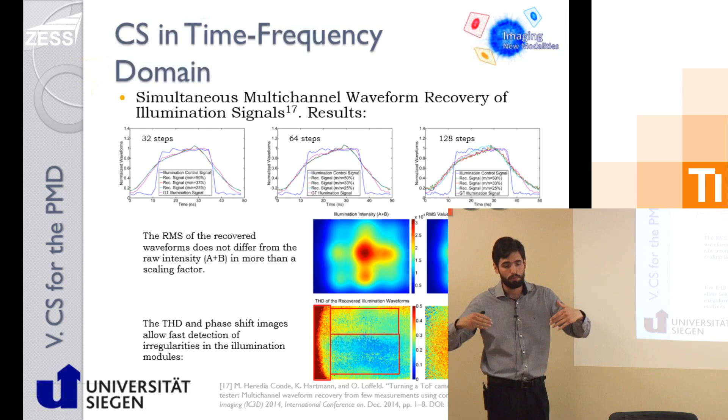So certain emitters placed in this area of the camera are somehow delayed with respect to others, and therefore you get a different depth. If you start measuring, this lack of synchronism in your illumination system is superimposing a certain pattern in depth on your scene, and this can be, for example, calibrated.

This was done and it was published, I think we have the publication there. But a further evolution will be to do things properly and measure properly.

You cannot expect that simply moving the signal around you are getting good sensing kernels. So why not generate really good sensing kernels, like pseudo-random custom codes that you are able to design as measurement kernels, and measure this signal according to these sensing functions. This is what we did.

We kept things easy for the illumination system. We have LEDs, they cannot do magic, so modulated at 20 megahertz maximally, working properly, generating those signals with rising and falling times that are non-negligible but more or less sinusoidal. That means a very narrow frequency bandwidth.

But on the other hand, let's push the PMD pixel to work up to the limit of the bandwidth, or better said, let's push the control system more than the PMD pixel, and generate those codes in which the maximum length of the code gives you also the ratio between the clocking frequency and the frequency of your illumination control signal. So you have to keep this trade-off in mind.

And from now on it's exactly as before. So we receive a certain waveform that is delayed by the scene at each of the pixels. We measure M cross correlation or correlation measurements according to different codes, M different codes, and we sparsely recover the frequencies according to a certain frequency dictionary.

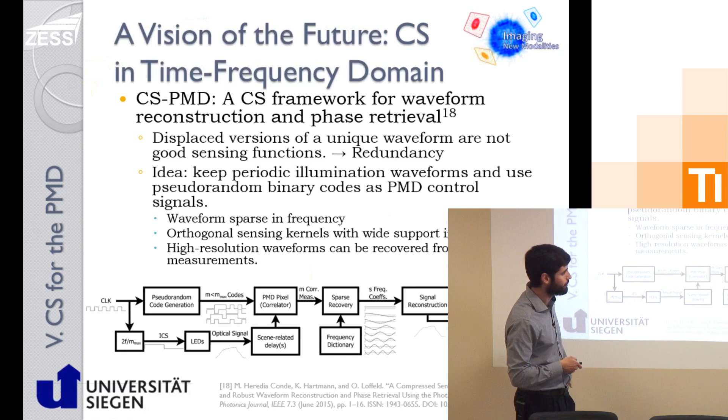Now once we have the signal that is relatively clean, we can even try a multipath or multi-target phase shift estimation. If this signal were perfectly sinusoidal, you cannot resolve more than one target, you have no bandwidth, it's impossible. If this signal is non-sinusoidal, in principle you could try to resolve more than one target per pixel.

This is what we did, and here we have now the recovered signals that do not look like before. These are discretizations that are already competitive, I think we did 720 and 1440, that means 2 or 4 discrete steps per decimal degree, and we see that they are pretty fine for M equal 8, 16, and 32 frequencies, which are equal to the number of kernels we used for the measurements.

We have something that is good enough for estimating phase shift. This is what we did. In this case everything is synthetic, but everything was synthetically generated from real data.

So both the illumination signals were real, the scene was real, the phases used to delay them were really acquired. This scene existed in practice, we acquired it, but we synthetically added this panel here, which uses the same waveforms, scaled and delayed according to a different phase, which is the phase of this panel. So a constant phase for all this area here.

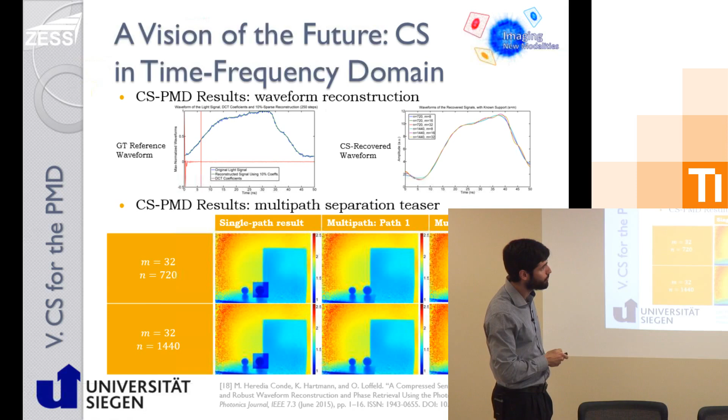Here we can see the object behind without the object in front, and resolve the object we have in front. This is important, as important as it is if you have an autonomous vehicle that is stopping before crashing into a glass. That's all. So we will see more or less what we saw before.

The core thing was applying compressive sensing theory to the photonic mixer device in order to improve the quality of the depth images. We saw that we could use a per pixel calibration to increase the compressibility of the raw data by eliminating fixed pattern noise, and this was very useful. We also presented an adaptive high dynamic range framework that avoided saturation and the suppression of the background illumination system that was corrupting the raw images. This was also important, and we saw that we can force the system to work in low energy operation and apply joint bilateral filtering to largely reduce photon shot noise.

Later, in the application part, in the real work, we have an empirical characterization of the PMD pixel response in the 2D spatial domain. We used this characterization for a super resolution framework in which we were able to resolve up to a super resolution factor of 9 in a FLIM case study. And later, in the part of depth error reduction, we saw a greedy algorithm proposed in order to get attractive trade-offs between depth error reduction and data flow reduction.

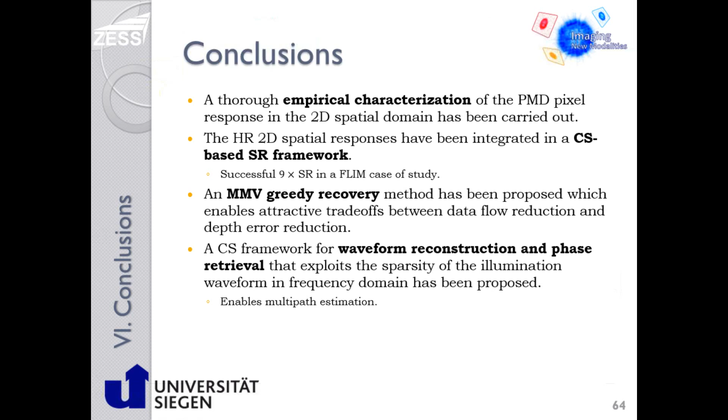Finally, in the time frequency domain, we presented a framework for waveform reconstruction and phase retrieval that, since it recovers the complete waveform, can be used to estimate the shift, and estimate more than one shift, more than one return per pixel. That was all, and thanks for your attention. If you have any question, I will be happy to answer.

Okay. Paula had to leave, so she left me here. So does anybody want to ask a question here? Everything is clear. Let me just make a comment.

Our collaboration with Miguel and with ZESS came from some time ago. We tried to apply for a Marie Curie grant, and we didn't make it because at that time Miguel didn't have his thesis ready. Later we tried what we call a European Training Network. We didn't get through, but we were pretty close - we had 90 points out of 100, and they were funded from 95 on. So we were about to get it, but it wasn't so. I think we're trying to do the same again, to go for the ETN again in January - this is the deadline. Another closer cooperation is with Julio. Julio Yade defended his thesis some time ago, actually on April 24th. Our idea is to redesign the chip, submit another time-of-flight chip, and if possible cooperate to apply Miguel's compressive sensing techniques to this chip. Actually he's here, he's been here for a month, giving us chip specifications for better cooperation. So we already talked about this, and I have no special questions.